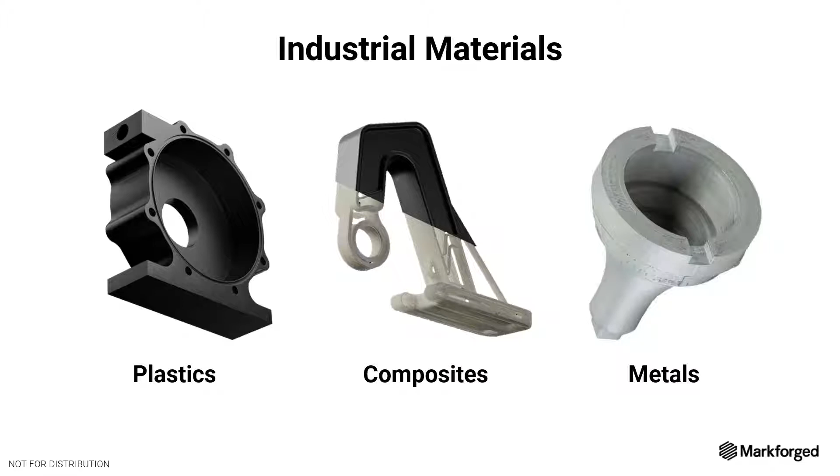So materials - we're talking about industrial materials. Really, the mantra, the name of the game for Markforged is strong materials. They're not after the weak ABS or PLA materials, their game is strong parts. So you see they have the plastics, which is the chopped carbon fiber, and then they have the continuous reinforced fiber in the middle there. And then, of course, to fit into the strong parts, they have metals. So that's what we're going to introduce, the Markforged Metal technology.

Now this was introduced probably 3 years ago maybe, and ever since then they've just been on a full court press developing new materials. They introduced a larger sintering furnace, and really just honing in the software to have a better user experience and better results with the parts that you get out of the system.

So basically, it did change the game. Pat and I, when we first started this division 6 years ago, we had a powder bed system in here for 4 years, and it was difficult - it was difficult to run. There was a lot going on in the laser system.

So when this came out, we had it delivered, and in one week we had everything up and going and printing parts. The safe part of it is that you don't need an explosion-proof room. All the metal powder is bound in a reel, and I'll show you the metal powder when we flip on the webcam. So it's safe. The actual 3D printer can work right in the office if you want it to.

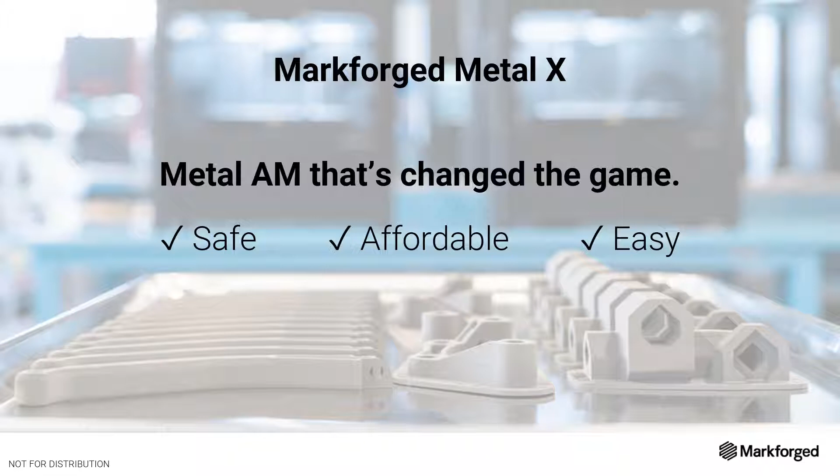Easy. Like I said before, we had the system up and going in less than a week making parts. And you'll see the software that drives it is very easy as well. Really the caveat, the easy part, running the system is easy.

And really where the skill comes in is designing your parts - designing your parts more for additive manufacturing and more for the Metal X system itself.

So the metals right now available through Markforged and through Miller 3D, we have these six materials, which I think are very exciting, available right now. They're sitting right in front of me. We have 17-4 stainless, Inconel, H13, D2, A2 tool steels, and then also pure copper - it's not a copper blend, it's pure copper.

In development is titanium and 316L, and this is not a short list. Their list is very, very long. If you flash forward five years from now, there could be 100 metals.

But there's one thing that's clear - Markforged, before they release anything to market, whether it be material, a new 3D printer, whatever, goes through a lot of testing, a lot of third-party testing before they release it to market. So it takes some time, but when they release it to the market and to the users, they know it works. And in my mind, I'd rather that - I'd rather not be the guinea pig.

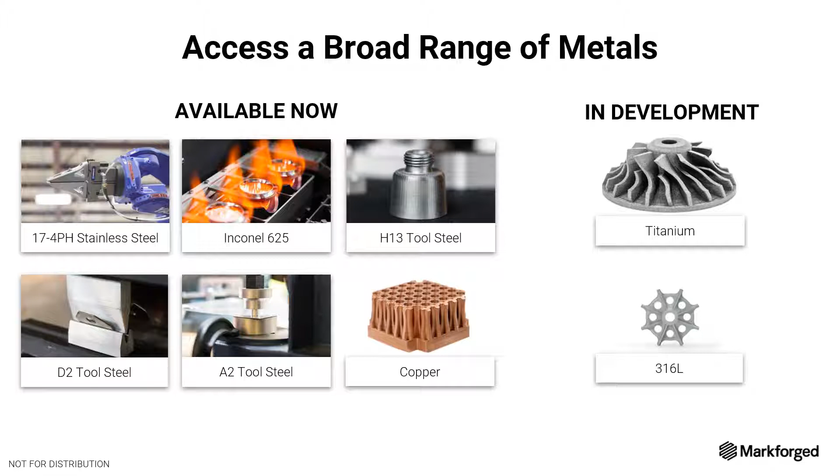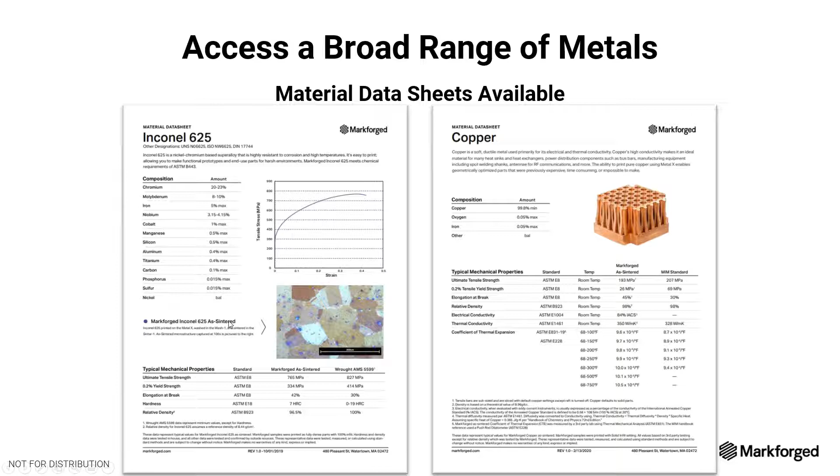With the third-party testing, each material released to the market also comes with a third-party verified data sheet. It goes through all the composition, it goes through the mechanical properties. In the case of copper, you also have electrical and thermal conductivity that's important in that material. So all these are available, and if you'd like to see them, it also has a little grain structure that you can see here that they get as well.

So how does this work? At a high level, you print it, you wash it or debind it, and then you sinter it, and then you have your part. So it's a three-step process: you print it, you wash it, and then you sinter it, as far as the physical part goes. Then there's the software, which obviously comes before, and we'll take a look at that with Pat.

So these are just some videos of the 3D printing process - obviously not this fast yet. It's important to know what's going on here though. If you're familiar with FDM printing, which is the most common, it works very similar. It's a metal reel, a lot like the plastic reel - heat it up and it's fed right through the nozzle, and you 3D print just as you would with plastic material.

Also, the print head has a second nozzle, and that lays down this white material here. Now, the white material - what that is, is a ceramic. The ceramic is the interface between the actual part and the support structures. So this whole part will ride along into the debind or wash, and then it goes through the sinter. And out of the sinter, this white ceramic material will turn to dust or powder, and then your part just pops right off.

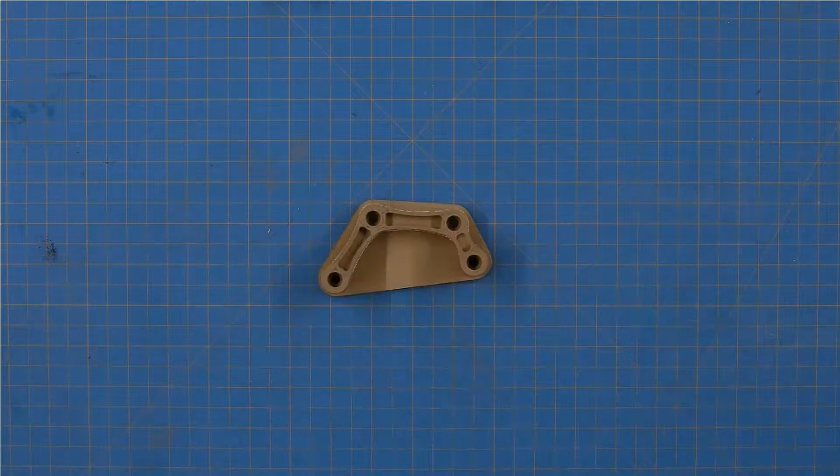So after you're done with the 3D printing, you open up the doors. It is a heated environment. You see the build sheet that it prints the part on, and then you just peel away the part off the build sheet, and you're able to use the build sheet again for another part. The build sheet is held down with a vacuum table inside the machine, so you don't need air to the machine—there's an onboard compressor. And there's your part.

So this is in the green state, what we call the green state. If you look down under a microscope, way, way small, you're going to see something that looks like this. These are the metal powder particles, and there's millions of them. They're all held together with a wax polymer—the wax is in orange and the polymer is in blue. So it's all holding the metal particles together.

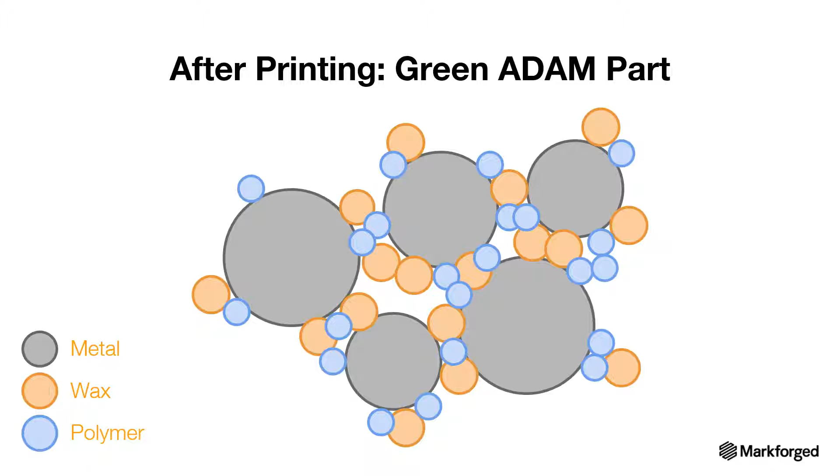So now the trick is, how do we get that all out of there? How do we get the wax and the polymer out of the green part so we're only left with metal? And this is where, remember when I said this is a three-step process, this is where the other two processes come in.

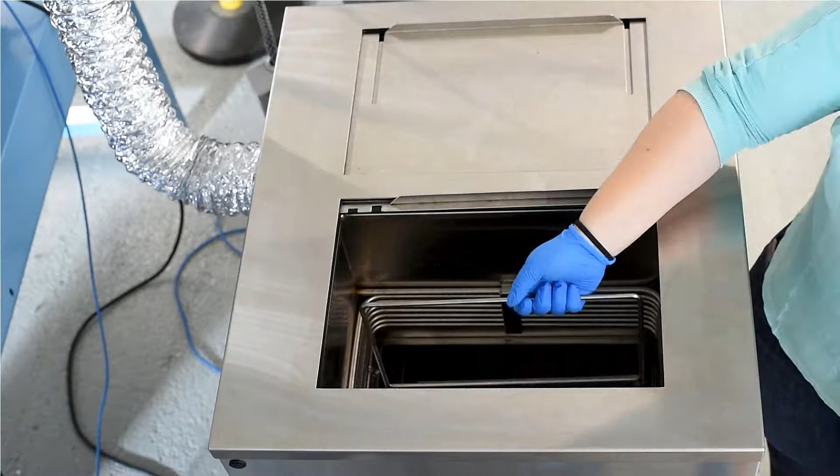So the next is a wash tank, or debind. This is a way to get rid of the wax. There's a chemical in there—it's almost like an industrial degreaser, and the solution basically permeates the part and extracts all the wax out of the part.

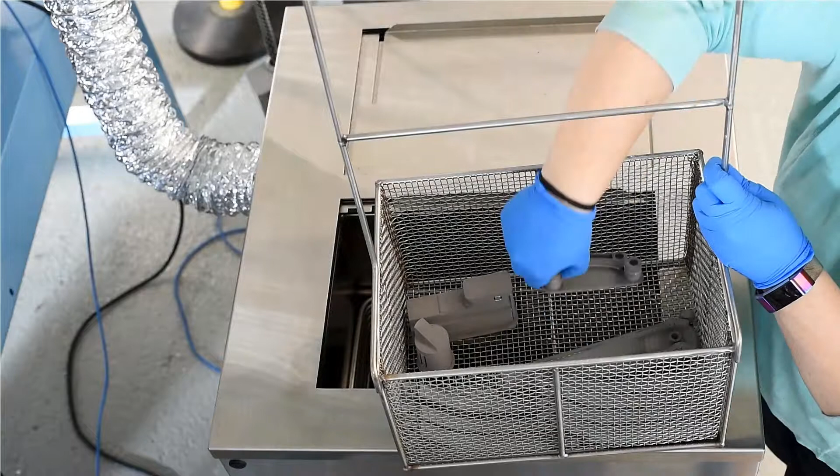So you can see you can do multiple parts at once. You can have different layers if you want, and you can't overwash a part, so you can leave them in over the weekend. Once a part is ready, you take it out of the basket and put it over into the drying area. This is just drying, making sure the part is at a certain weight—there's a weight reduction we're looking for from the printer out of the debind tank. That weight is the wax. Once we're good on the weight, then we can move on.

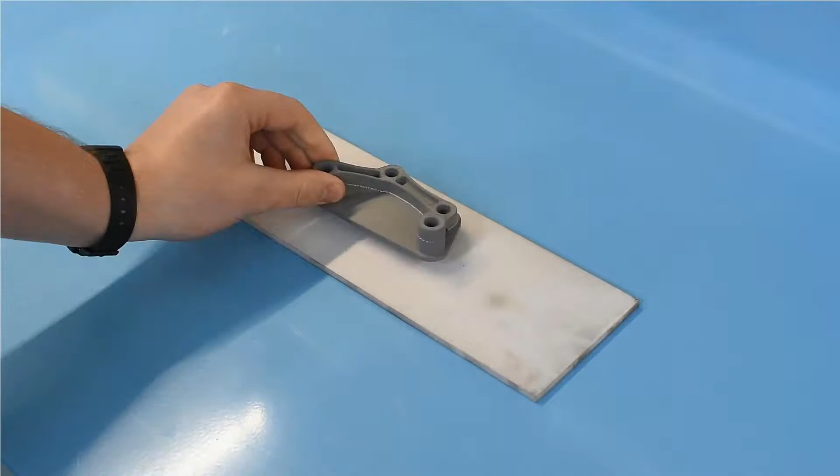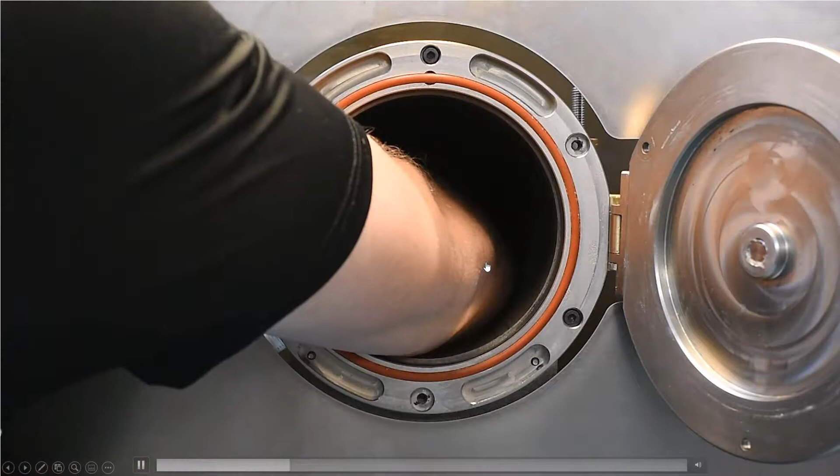Over to the sintering—the sintering furnace has a ceramic plate that you place the brown part on. Now we're calling it the brown part after the wash. This is the sintering furnace here, it's a tubular furnace, and you place your ceramic plate all the way in. There's a stop, and then you tighten it up, and then you sinter it.

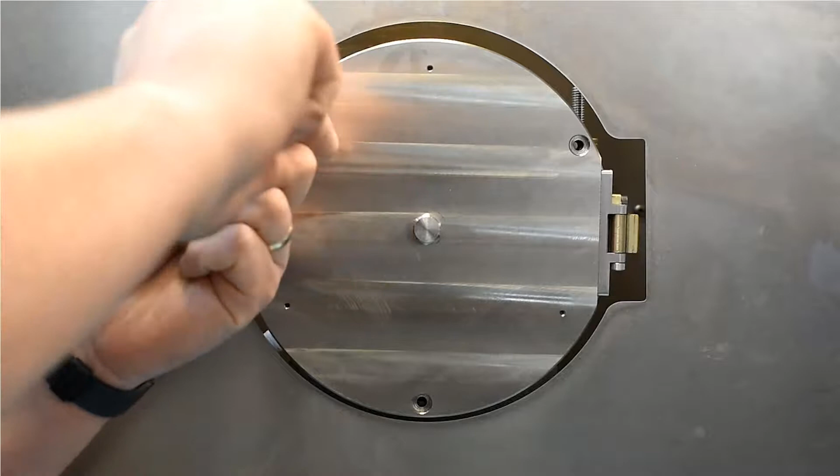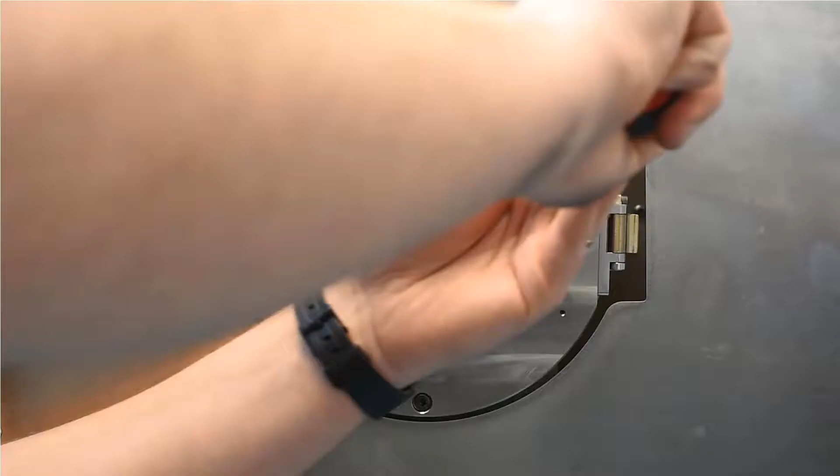Each of the materials has a preset sintering curve, where it heats up at a certain temperature, then heats up to around 80% of the melting temperature, and then ramps down. All the materials are already set for you, which is nice—you don't have to play around with any of the heat curves. You can sinter as many parts inside the furnace as you can fit on the ceramic plate, whether small, larger, or a lot of small parts. It doesn't matter—it's a fixed cycle, and each material has its own cycle.

So when you're done, you pop open the door, and right out of the furnace it's completely safe. The sintering furnace is tricked out with all these different sensors and everything, so when you open up the door, you're assured that it's completely safe.

And now this part is 100% metal. There's no binder in there, no wax or polymer inside that part—it's 100% metal. Now, you might have seen how easy it was to take the part off of that.

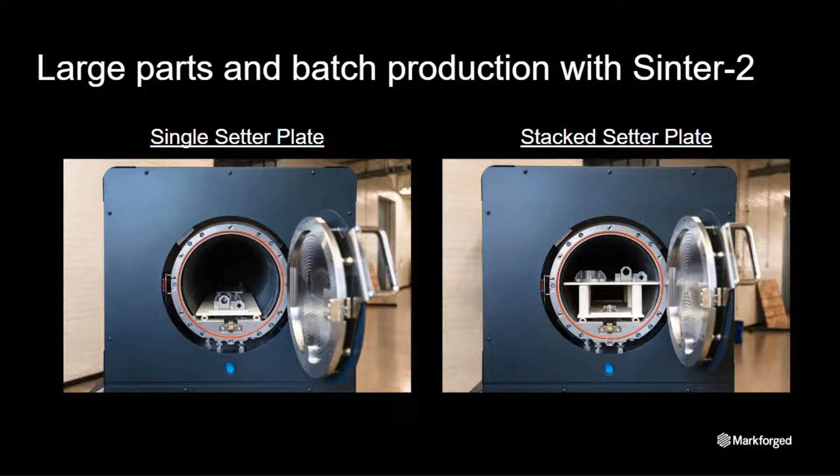So I just wanted to talk about one of our customers before we go over to Pat. The name of the company is Caldwell, and what they make is high-end window closures, door closures for all different companies, large houses, things like that.

They started off on this journey with just a plastic printer in mind, and what they ended up getting was a carbon fiber printer as well as the metal system. What I find interesting is that they really adopted it. You can see right from the president, it's part of their culture now, and they really can't live without it.

So much so that they've ordered many more of the carbon fiber 3D printers, and they put these printers at different divisions around the country. It really allows the tool makers and the design engineers to get creative, have design iterations, print actual functional tooling for production, and it's really across the board.

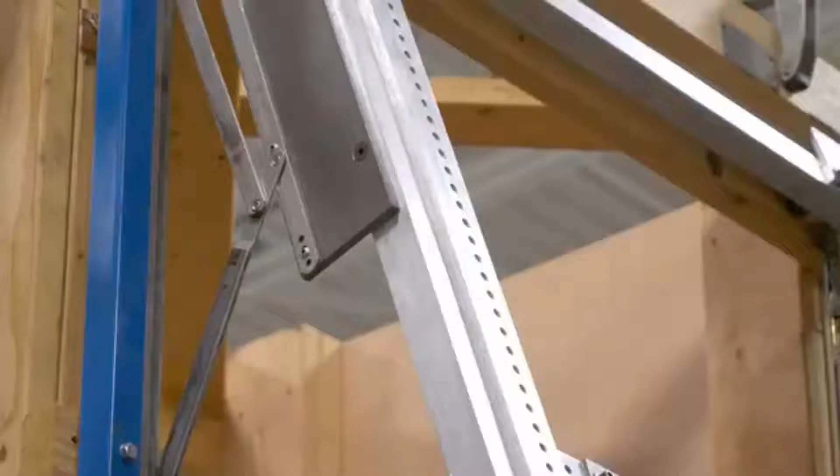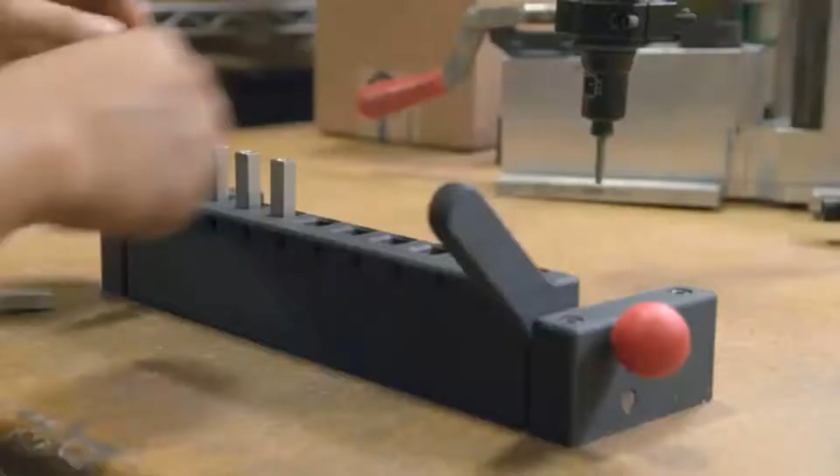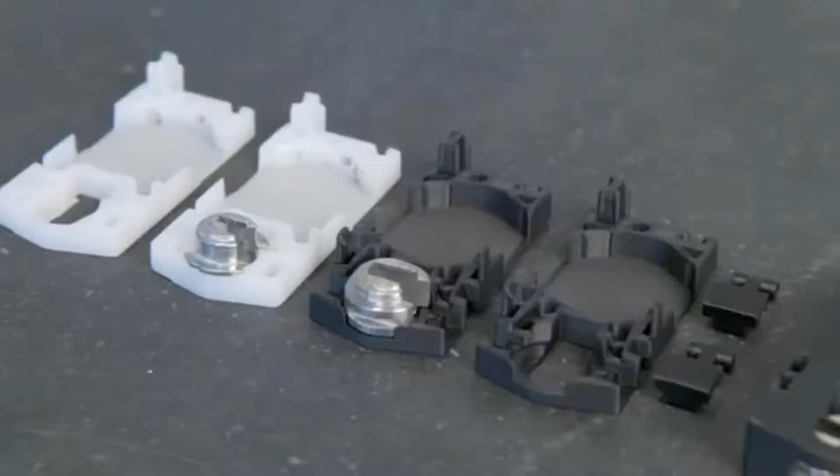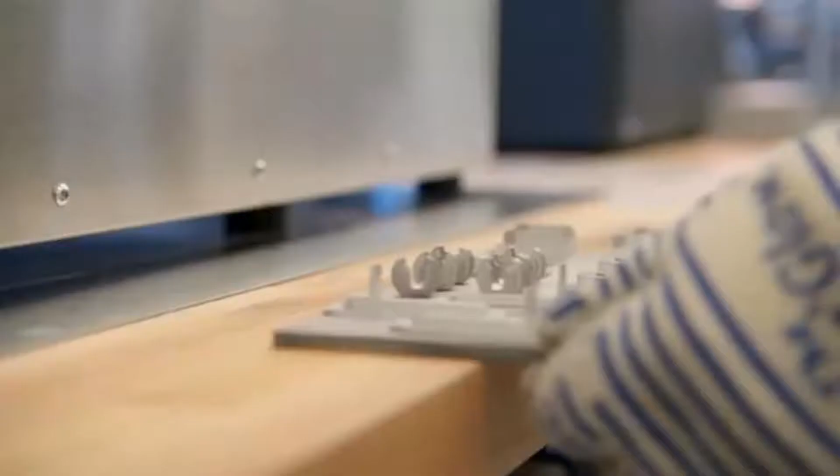To make everything from prototype all the way through low volume production. That's 2 days.

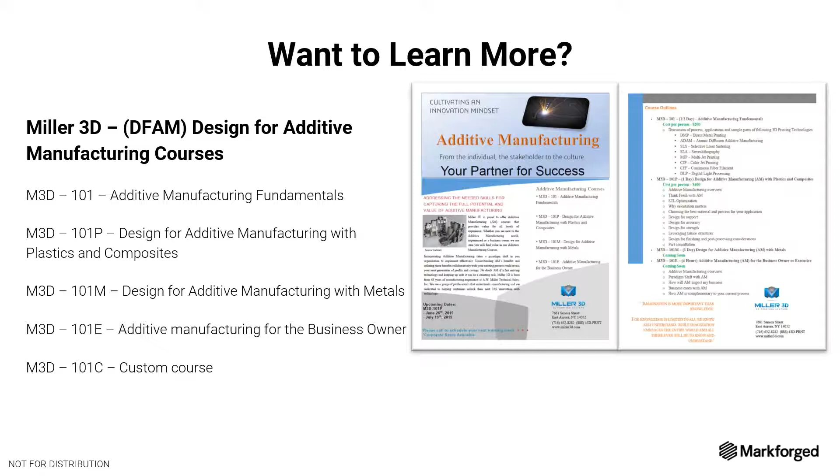Also, Markforged has it covered on the back end. Once you actually have the equipment in house, you can either go to Markforged or they can come to you, and they can teach you all about additive design for the Markforged equipment specifically.

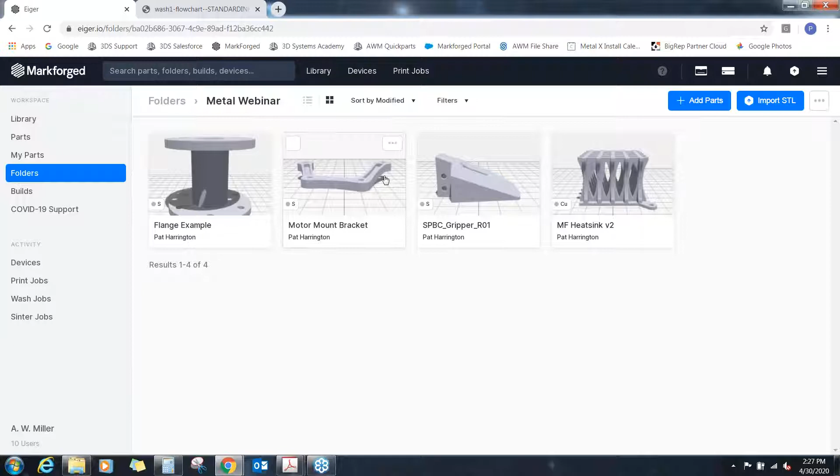What we'll do is start off with a file that you saw in some of those videos. This is a mini motor mount bracket that's printed in 17-4 stainless steel. So we have here our grid pattern — this is the size of a part that we're able to print on our Metal X system.

And then we have a few options that we can play with. So material, we can choose from 17-4 stainless, 3 different tool steels, an Inconel, and a copper. And then you'll see below here that we're also able to choose which type of sintering furnace that we're going to use to accommodate these parts.

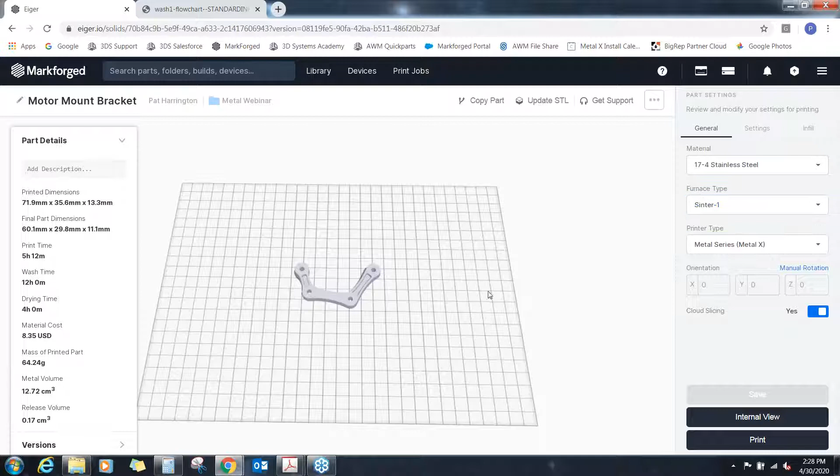What this really does is it dictates the size of the part that you can send through the whole process. So if you have a Sinter 1, you're constrained to smaller size parts, and if you have a Sinter 2, you're able to do, for the most part, up to the full build envelope of the printer, which you're seeing here. So I have a graphic pulled up here that kind of shows what size parts each of the configurations can accommodate.

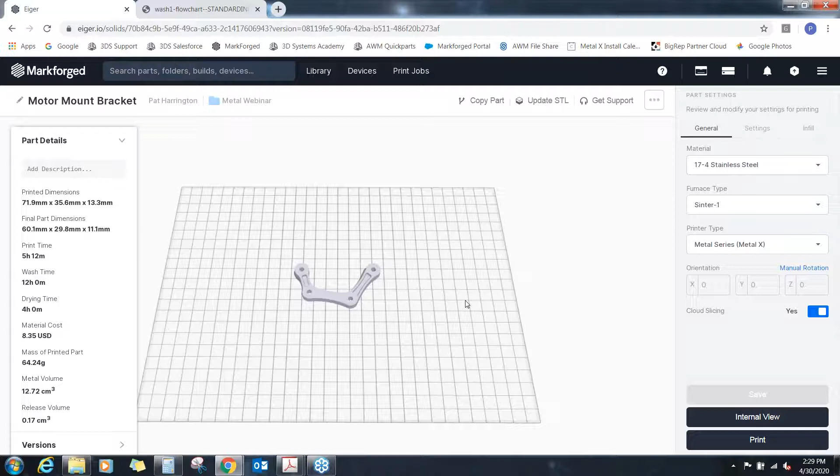In terms of setting up your print, as Matt said, it's very easy to just choose some simple options and set this going, where compared to the powder bed system that we had in the past, with that system we were really tuning and tweaking laser speeds and laser power and scanning speeds and all these things. This machine's really just tell it how you want it to print and it will take care of the rest.

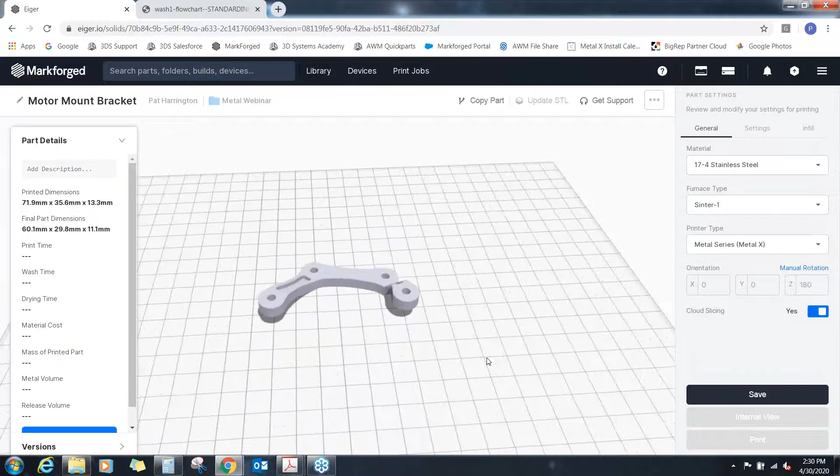So part orientation is very simple. In a case where this part maybe came in, maybe you designed it on a different plane system, came in like that, you're just going to go ahead and click on the surface that you'd like to be down facing, and it will automatically snap to that. So I'm going to spin that around here. And we can go into the settings tab.

So we have some opportunities here to choose different layer heights. This is post-sintered layer height. The reason why it's saying post-sintered layer height is because these parts are actually going to be printed at a factor of around 20% larger than you design them in your CAD. And there's nothing you need to do in terms of compensating your parts. The software is intelligent enough to handle that on its own.

So I'll kind of show you the difference here. If I switch over to our composite machine, this is the true size of the part that will be your finished product after it's sent through the whole process. And then this scaled up version is the scale at which it will print to accommodate for that shrink factor. So 5 thou is the equivalent of 0.125 millimeters, and that will be your post-sintered layer height.

Now we also have an option in some of the materials to experiment with an alpha print setting. Alpha is just another way of saying it's an experimental print setting, something that they like to release to customers to give them an option to play with before they release it as a full finished print setting. But we've had some nice success with it. 50 micron layer height, that's the equivalent of 2 thou. We've had good success with printing some parts with threads that come out quite nice. That's just another option that you have to choose to play with.

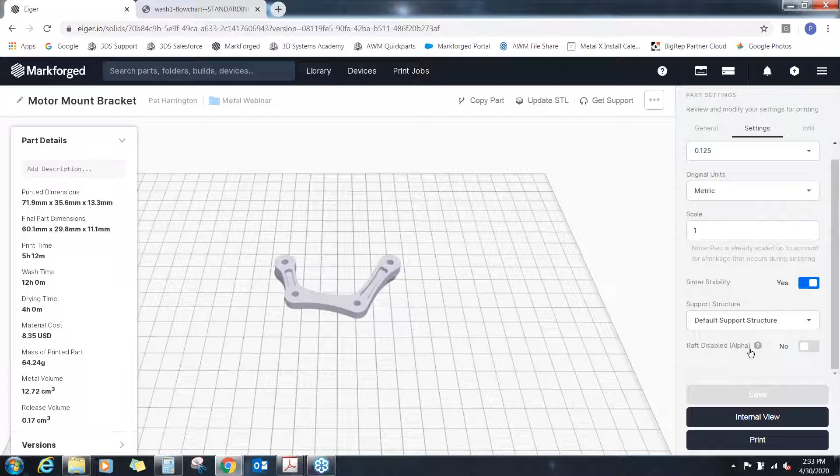Lastly, an option here is disabling the raft. As you saw in the video, this part is printed on a raft. There's an option to disable rafts for smaller or more flat parts. But what we've found is the raft does quite a bit for making sure the part shrinks uniformly in the sintering process. These parts shrink around their geometrical centroid, so the raft ensures that, in a part like this, you won't get uneven shrinkage in the smaller leg versus the longer leg. The raft keeps the whole part together so it'll shrink more uniformly. But in certain parts and geometries, you can turn off that raft and save material and print time.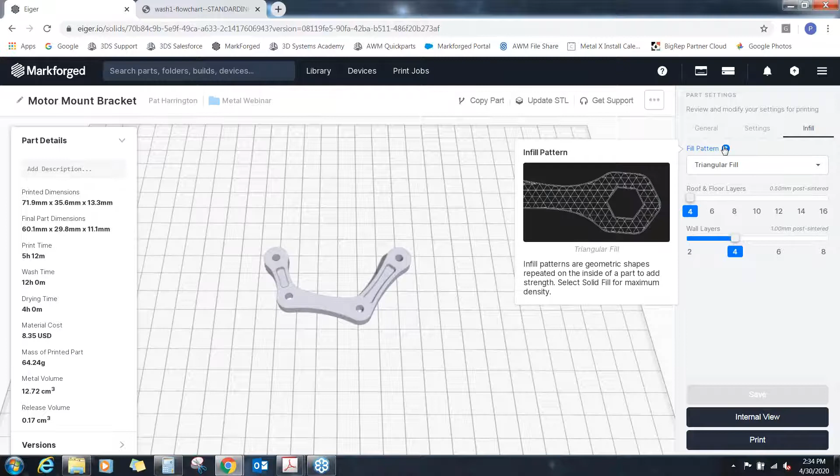Lastly, we have the option to play with our fill pattern. On these metal parts, by default, you're going to be printing with a triangular fill pattern. That saves you print time, quite a bit, and it saves you material, so cost. It also saves you quite a bit of time in washing, which Matt touched on. The time it takes to wash a part is really a function of how long it takes that solvent chemical to penetrate through the entire cross-section of the part. So with your part being infilled, that will take roughly 12 hours for most parts, as you can see highlighted here. But as we go towards solid, it's going to increase the amount of time that wash cycle will take.

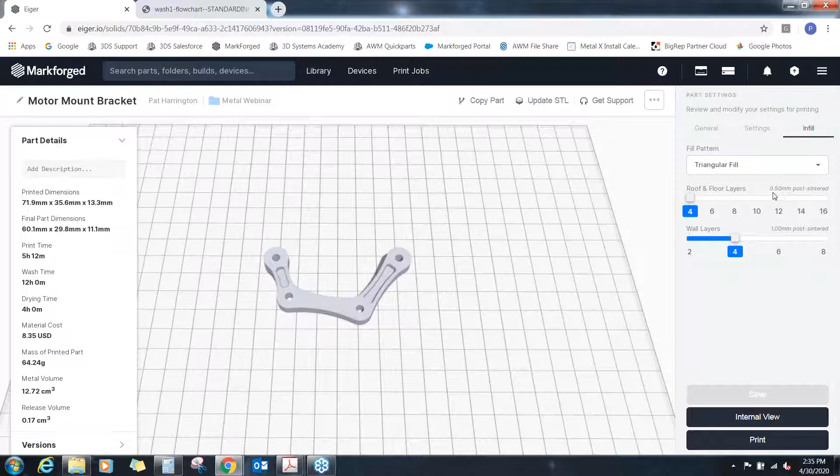Another set of options we have to play with are roof and floor layers, as well as wall layers. What you're seeing here on the side tells us what that thickness is on the outside shell of our part before the infill starts. This is particularly relevant for folks who want to print a hole that's a critical dimension and want to ream it out to get it perfectly to size. This will give them a little extra stock on the inside of the part that they can remove to get the hole true to size. You can control, based on what we select here, how much post-sinter stock is on the part before the infill starts.

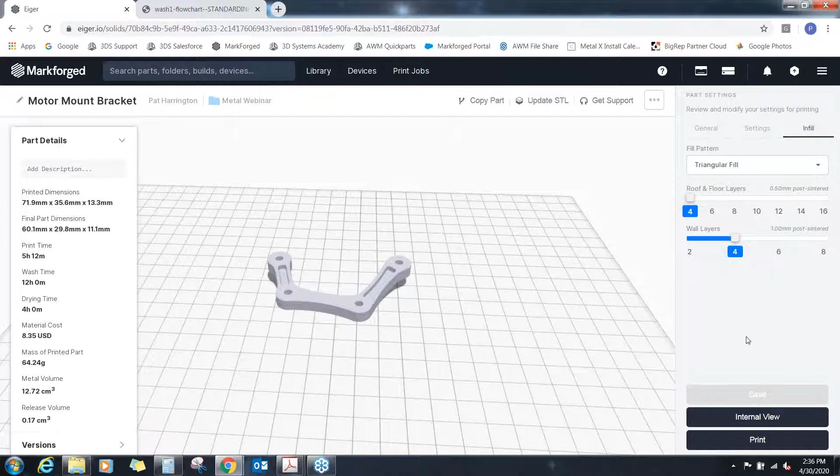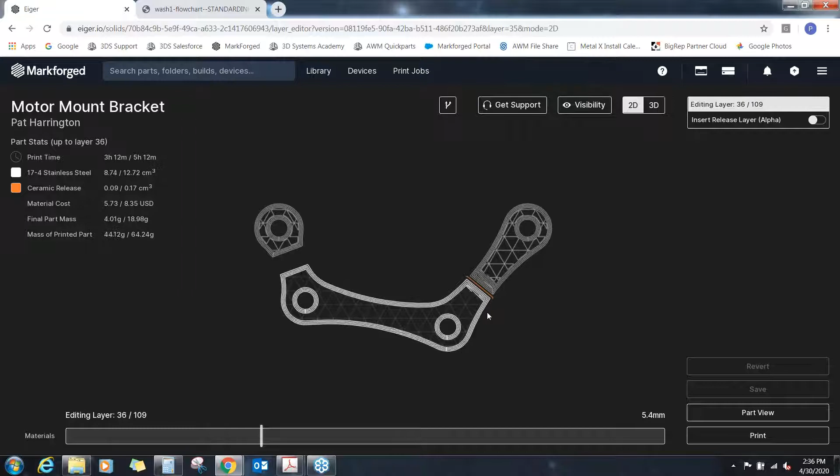So those are some of the options here. If we go to our internal view, you can get a better look at the raft we mentioned. And if I go to my 2D view, as I scrub through the individual layers, you'll be able to see this orange, which is the ceramic release material. As I move through the part, you'll see the ceramic release material is added as this part grows on top of the support structure. At the end of the sintering process, as Matt mentioned, we like to clamp the raft part in the table vise, tap the back of it with a hammer, and the part will pop right off of the raft. So pretty simple in terms of options you need to designate for your parts.

Let me show you another part here, just to give you an example of the options they're continuously adding to this cloud-based software. And because it's cloud-based, you don't have to worry about downloading them. You just log on one day and see that you have new options to experiment with.

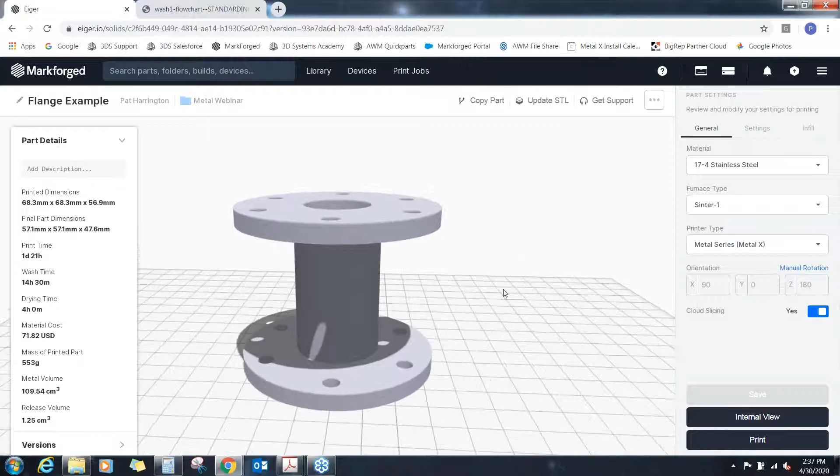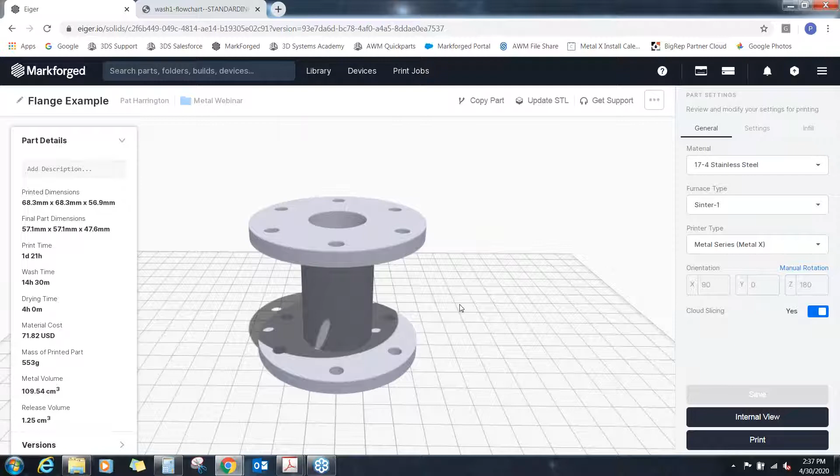When we first got this machine, a geometry like this was very challenging, and basically we couldn't do it without getting creative, mechanically removing supports with maybe a Dremel or something. The reason for that is the support material is required underneath this upper flange, and it connects the upper and lower flange. It's basically going to be a complete donut shape of supports around this inside neck, and there's no way to remove that donut shape. That's why Markforged came up with an experimental print setting we've had a lot of great success with in parts of similar geometry, which is Radial Separations.

This allows you to designate how many radial cuts you'd like to implement into the part. And if I go into the internal view here and I take a cross section,

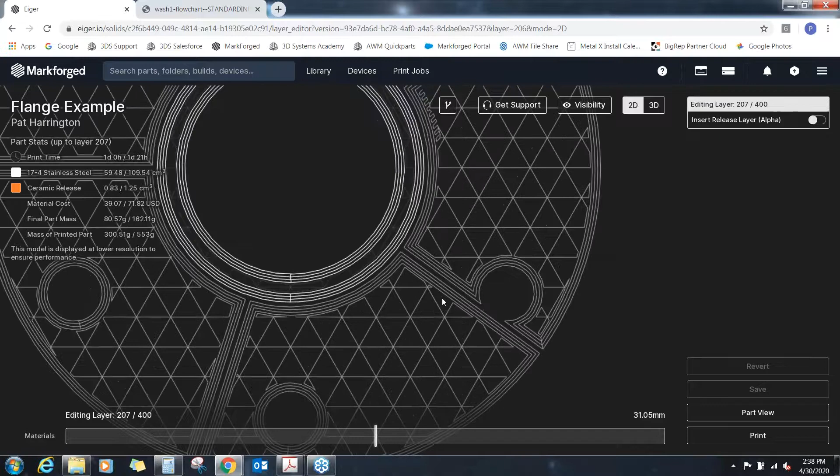You can actually see here's my inside neck of the part. This is about halfway up the part. And here are the supports. You can see these nice radial cuts in here. So this is going to allow this previously donut-shaped support structure to be removed in 5 sections.

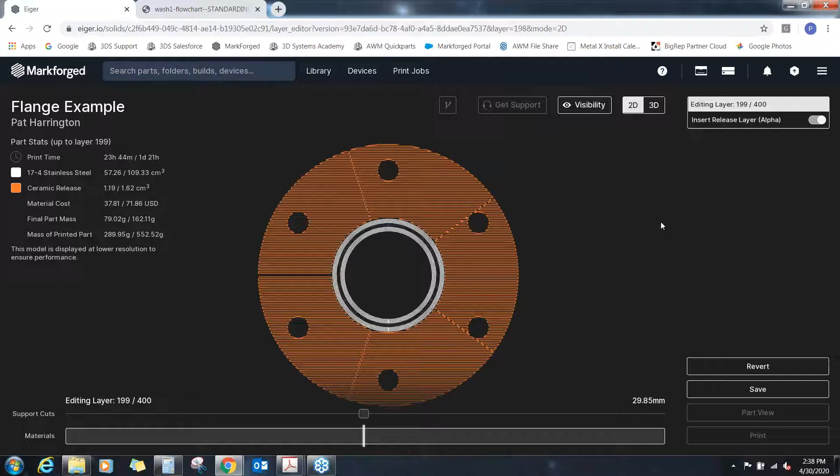We can also get creative with adding separations vertically in addition to horizontally. So by doing that, we'll go back to a layer, and we'll just say on this layer, insert a layer of ceramic release material. So you can designate where you'd like the printer to print this ceramic release material.

After the sintering process, on this layer, that ceramic release material will turn to a powder, and you'll be able to remove this support structure as 10 individual pieces rather than 5, because these 5 sections will break up into top and bottom sections. So it'll just make removal even easier. This is a great tool for parts that have more complex support strategies.

Let's take a look at our metal printer in Eiger. So Matt's going to show you some of the parts that are going on it right now, but we also have the ability to tap into a camera, and we can kind of see what's going on there.

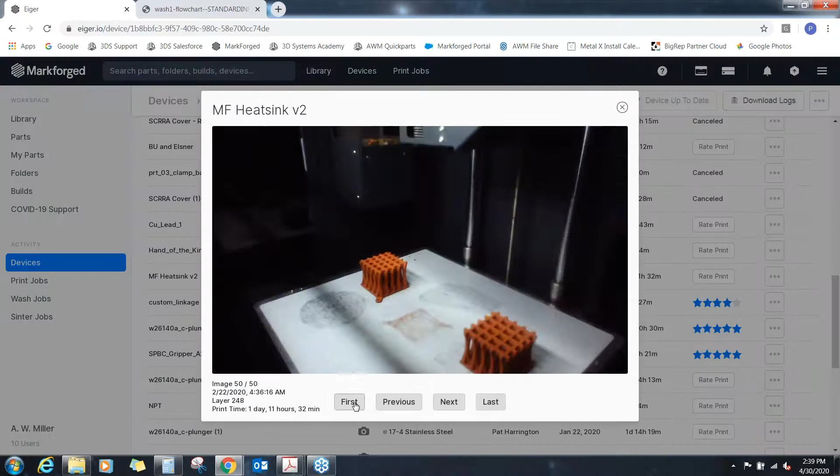Let's see if I can find some heat sinks. So here's some copper parts, and every 5 layers, it's going to take an image as it's growing our metal parts. Sometimes we like to check in on our phone, make sure the parts are looking good. And you can do that right in the Eiger software.

Another part of the metal process, which is captured in the Eiger software, is this wash tab. So as Matt mentioned, we like to wash our parts prior to sintering. It takes it from a green part to a brown part.

What we're really looking for to tell ourselves okay, this part is okay to sinter, is the mass reduction. So Eiger makes that fairly easy. Let's take this same sample part, the motor mount bracket, and we'll click that we're going to wash this part.

So it's going to ask us, okay, before you wash it, please record the mass of that part. So we'll say it's at 57.56 grams. And then it's going to start a 12-hour timer.

As Matt mentioned, you can't overwash your part, so feel free to leave it in there for extra time. And then you will get an email from Eiger when your part has been in the wash for 12 hours. You'll go ahead and select, we're going to dry that part.

And it will start another timer of 4 hours. We found that 4 hours is pretty conservative. It's more for larger parts. A smaller part like this, you can typically have your part dry within an hour or so.

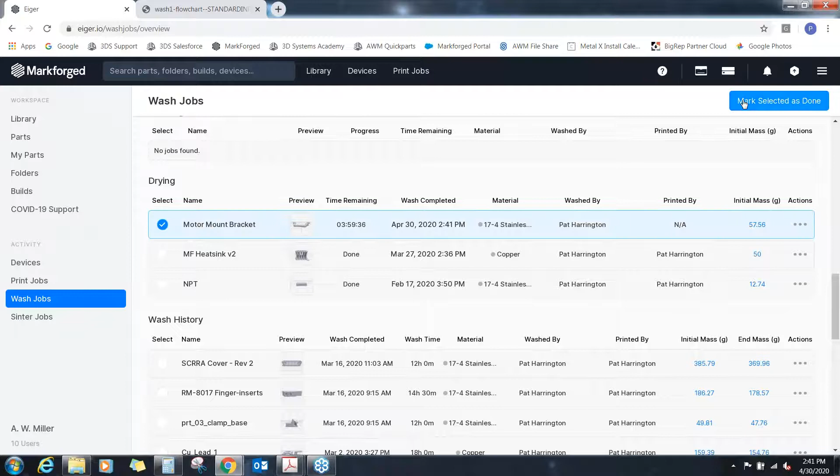You just want to make sure all that solvent's evaporated so that when you take the next mass measurement, you're not measuring the solvent. So we'll say okay, that part's dry. And then you'll enter in the final mass after you weigh the part, and the software will either not say anything, which means it's safe to sinter, or it will say, hey, your part has not reached the desired mass loss yet. Please rewash your part until we've hit the 4.1%, which is specific to a few materials.

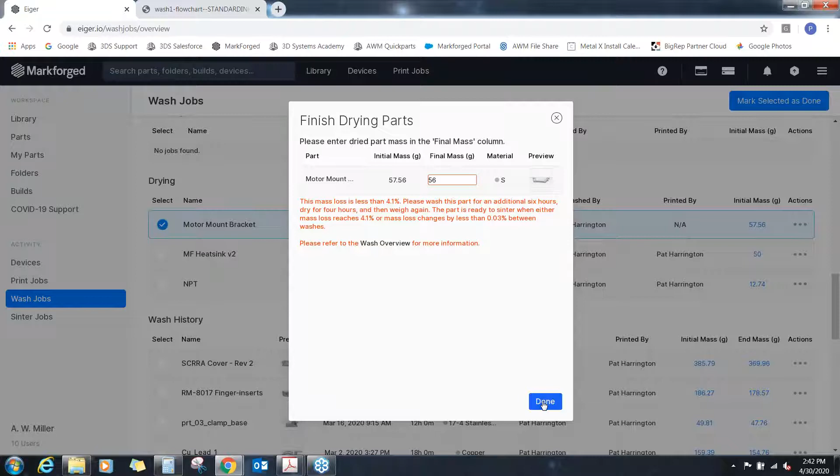In this case, 17-4 stainless. So let me pull up a flow chart that we have. Here are the mass reduction percents that we're shooting for in different materials. So for 17-4, H13, and A2, we're all at 4.1. Inconel is 3.8, D2 is at 4, and then copper is only 2.7. There's not quite as much wax in the copper material.

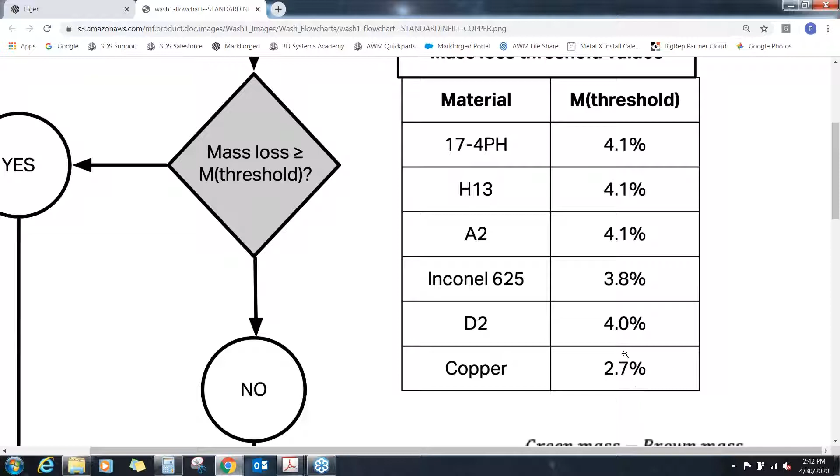As long as you get the okay from Eiger, you can put your parts into the furnace. The sintering process is controlled on the unit itself, but it can be monitored from Eiger. The run duration is really just a function of the material that you're running. It's not governed by how many parts you have in the furnace.

It's just a function of what material you're running, so it's always better to load up the furnace with as many parts as you can to keep your per-part cost down. And then those runs can be monitored from Eiger software. So if we look at this part here, this is a 17-4 run we did. It's going to estimate how much gas usage, inert gas we used, as well as our forming gas that are used in this process.

All right, so that's what I had for you on the software side, a quick overview of the whole workflow there. Anything you wanted me to add, Matt?

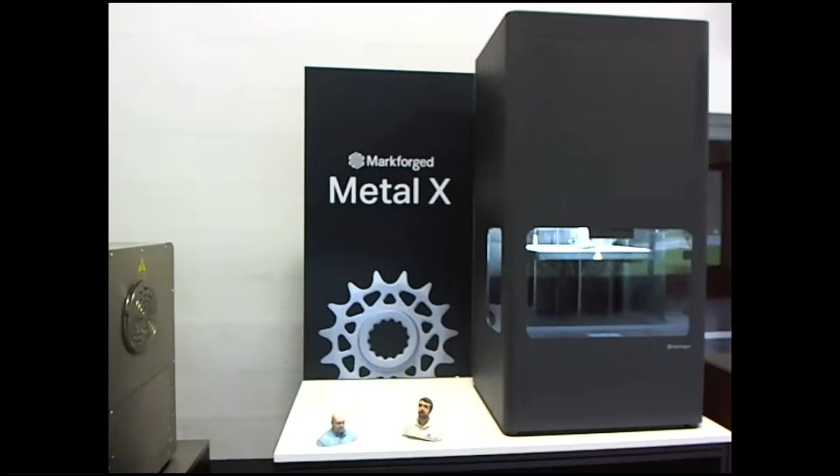No, I don't think so. We'll go on to the... thanks, Matt. Yeah, it was good. Now I flipped on the webcam. This is a live webcam, you can see my hand there. Just let me know if you can't see it. So basically, this is our Metal X, okay, and then we'll go down the line here.

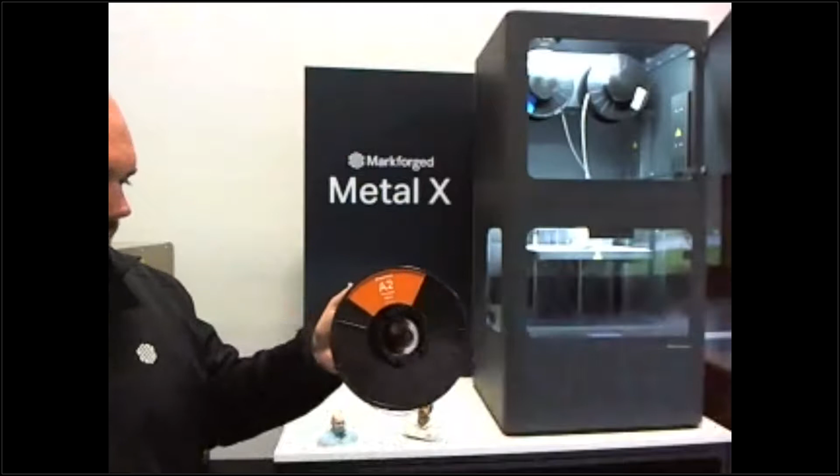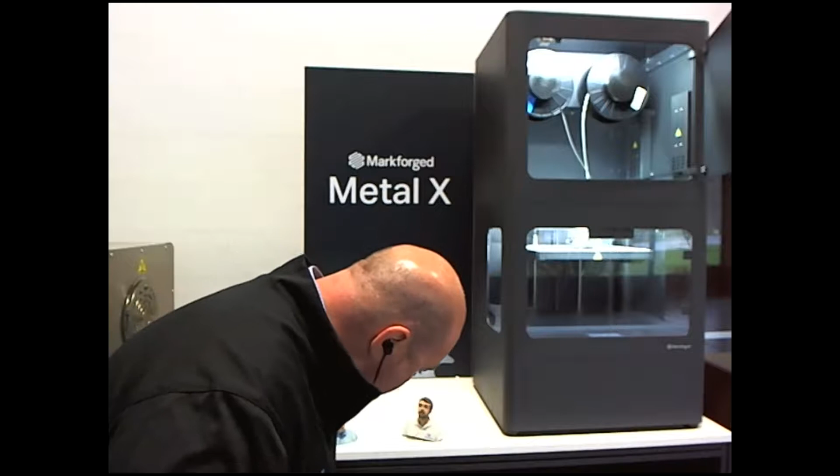So this is our Metal X printer, and I'll show you where the materials are. They're up in here, and you can see we have one reel of the 17-4 on the left, and then the ceramic on the right. What's really cool is that I could go from 17-4 over to A2 in about 10 minutes. This is the material, it comes in reel form. So going from copper to D2, A2, Inconel, whatever, I could do that relatively quickly.

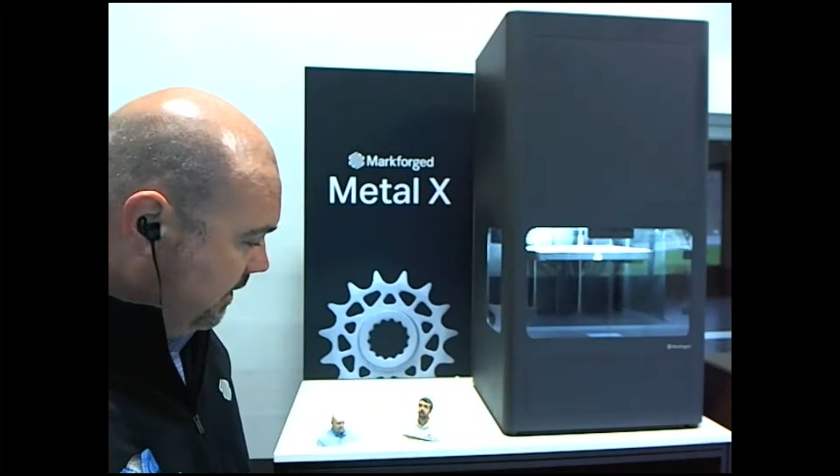And by the way, A2 and D2 can't be laser sintered as well. Those are true tool steels like H13. And if I loosen this up, you can see the materials down here.

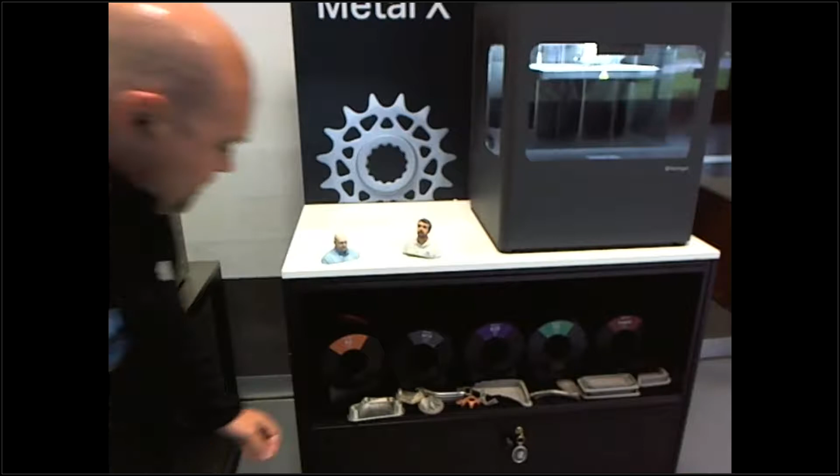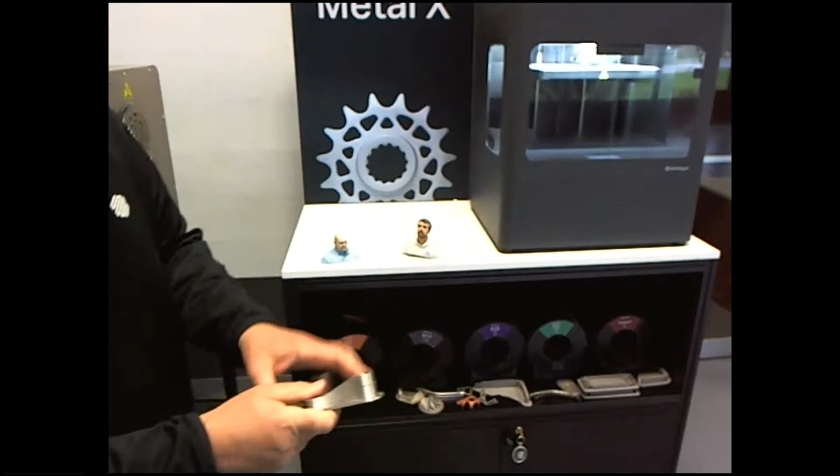These are actually some parts here, like this is the motor mount that Pat was looking at on the rack. So what we would do is just put it in a vise, give it a little tap, and it'll pop up. This is an Inconel turbine blade right here, and if you zoom in really close, you can see the 625 marker on the part itself.

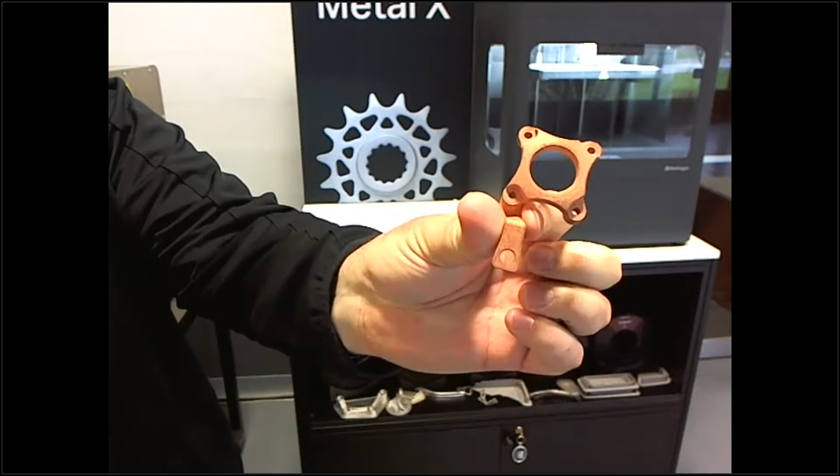Then as Pat mentioned, we also do copper. These are some copper parts that we did here. And then this is the honeycomb on the inside of the part, a little triangular view here. So that's the printer.

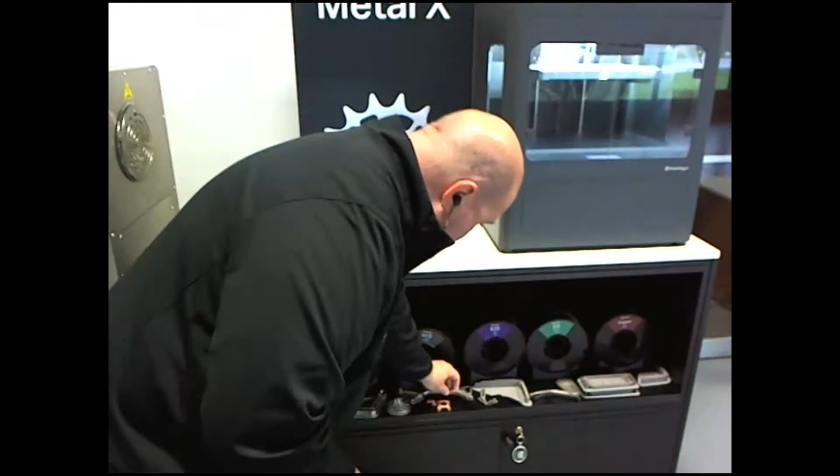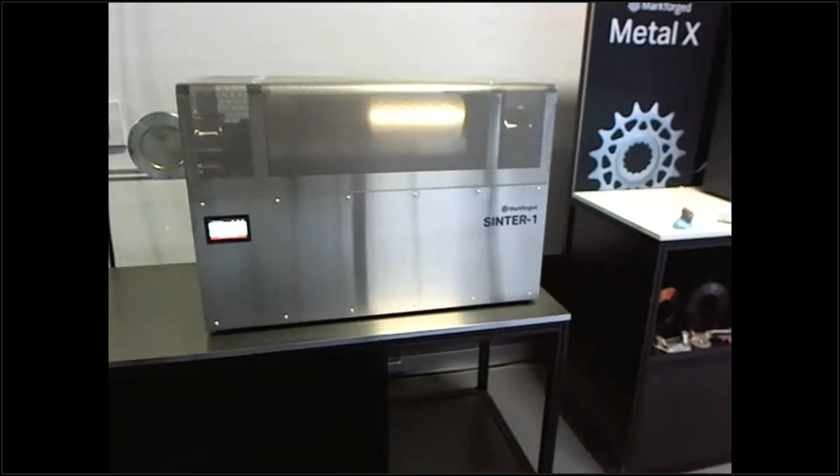We kind of march down the line here in my little cart. We have the sintering furnace, and it's the same idea as what you saw in the video. Here's the readout. This is the radiation shield, basically like a heat blocker there. And then inside is the ceramic plate that all the green parts would go on.

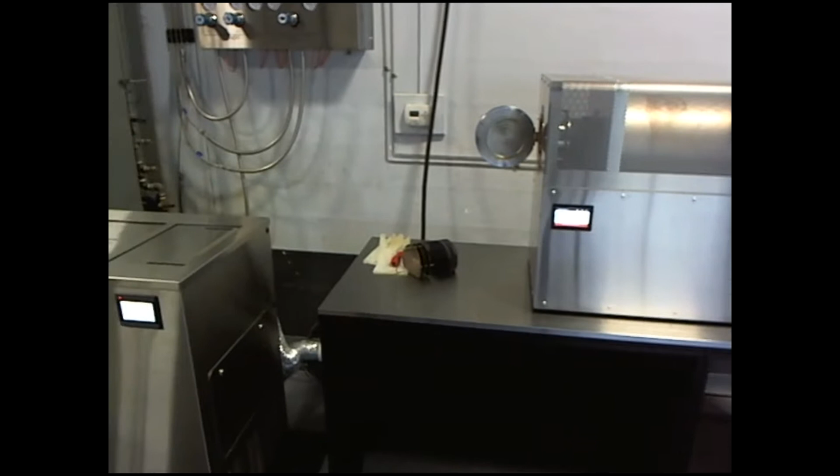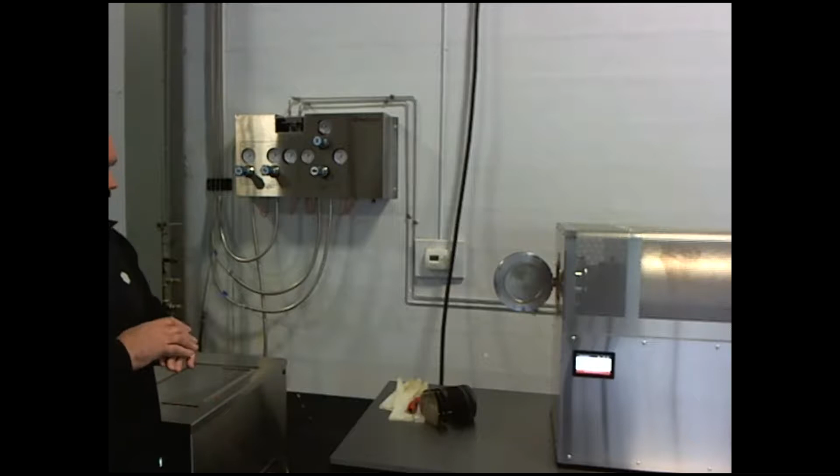Okay, so this furnace is hooked up to this gas panel, and the gas panel controls the inert gas as well as the mixing gas. There's two types of gases used with the system. One is the inert gas, all high purity argon, and that's to purge the inside of the sintering furnace. The mixed gas is mostly argon with a small percentage of hydrogen, and that's just to make sure there's absolutely no moisture inside the sintering furnace, because we don't want any corrosion or anything like that.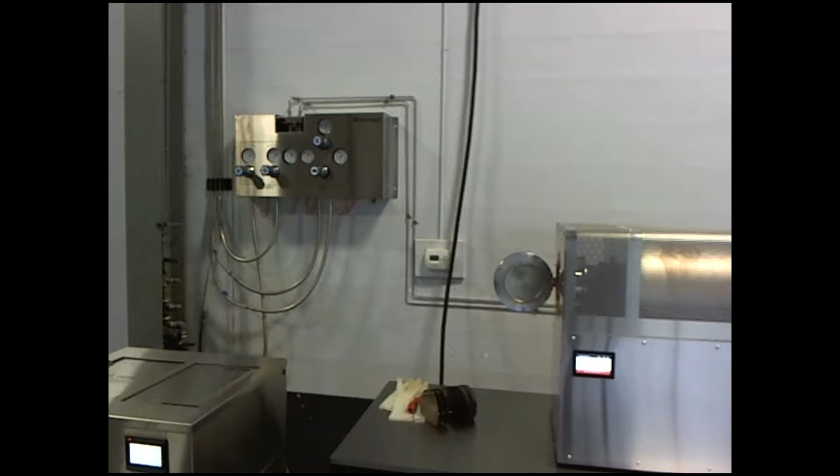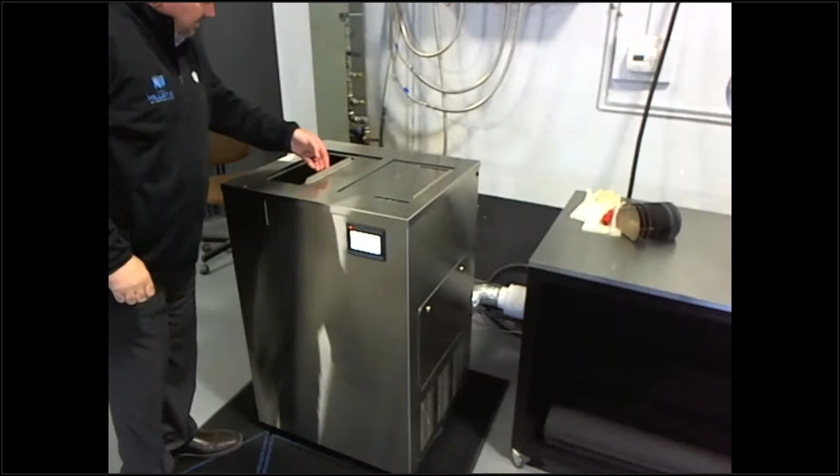Okay, and then lastly but not least, here's our wash tank, or debind tank. Again, this is the basket here, so you put as many parts as you can fit in the basket, and just let it run. This is really designed to be hands-off. The entire system is designed to be hands-off.

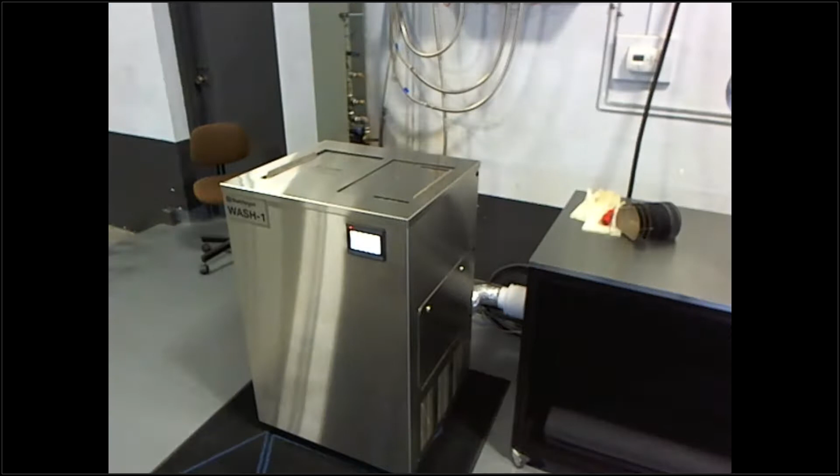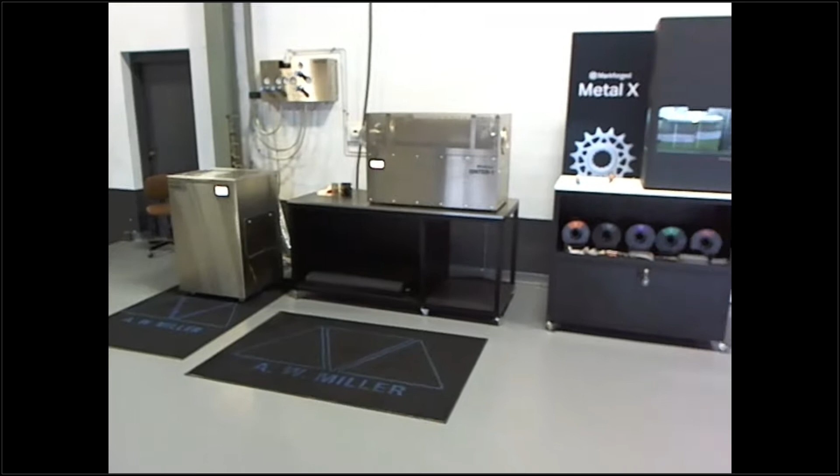And I can wheel it back here to give you kind of an overview of the entire system. So that's what you'd be looking at as far as the floor space goes for the system. Now, as far as the gas tanks, you can see our argon gas tanks over here. We chose the actual gas cylinders, so I think 4 of those are mixed gas and the rest are the inert. You could also choose liquid argon as well, it's a little bit cheaper. It'll be like a dewar of argon next to the machine.

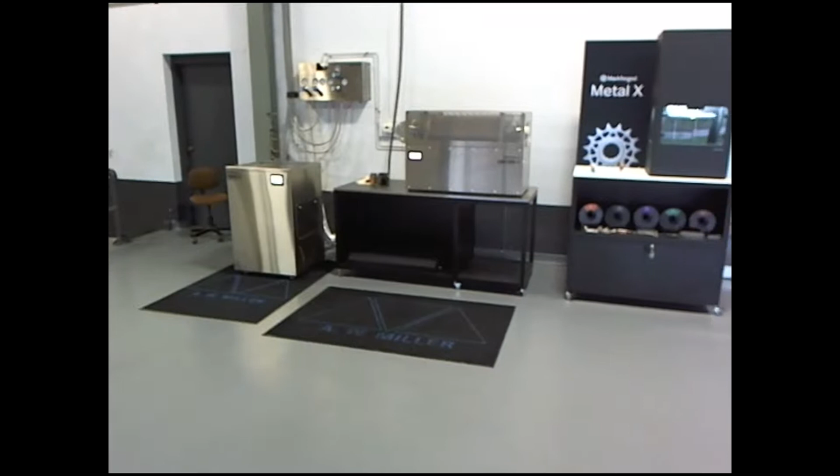The only thing we didn't like about the liquid argon is that it off-gases if you're not continuously using it for the furnace. And since we're printing off and on, it makes more sense to save the off-gassing and go with the regular gas. So that, in a nutshell, is the system. Is there any questions on anything that you heard today?

So again, we've got the printing, washing, and sintering.

Okay, going once, going twice. Oh, we have one question, Matt.

The question is, do all parts wash for 12 hours? It's really a function of the size of the part as well as the cross-sectional area. So the answer is no, not all parts wash within 12 hours. A large majority of them do, of the parts that we've done. But anytime you're getting into larger parts, maybe that would bode for the sinter 2, or if they're solid parts, they will likely take maybe a day to 2 days to wash. Typically for those types of parts, we'll just leave them in over the weekend, and they tend to be ready first thing Monday morning.

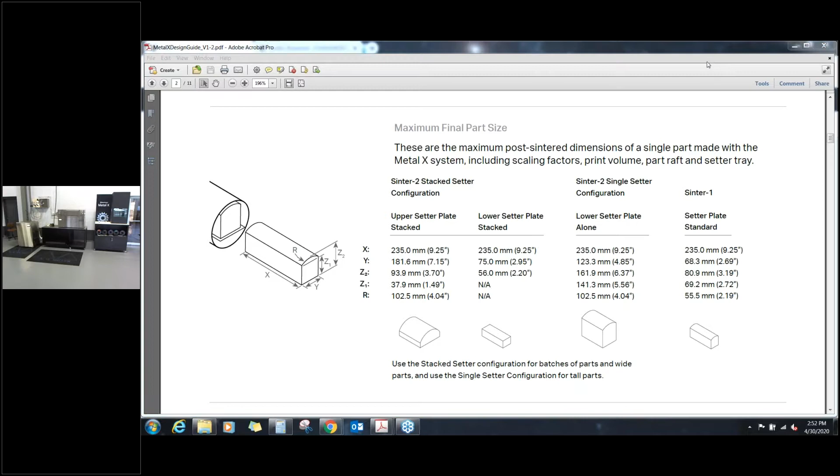Right now on the sinter 1, your part size you're looking at is 9 1/4 inches in the X direction by 2.69 in the Y. And then your height of your part is a function of whether it can fit within the radius of the tube. So if it can fit within that radius, it can go up to 3.19 inches. If it can't, it'll be 2.72 inches, and these are sinter 1 values.

These numbers account for the scaling up factor. So these are your final as-designed part dimensions. And then it will also account for that raft that's implemented to control the shrinkage. So after both of those 2 things, these are your sinter 1 part sizes.

For sinter 2, on a single setter plate, you're at 9 1/4 by 4.85. And then again, if you can fit within the radius or not, 6.37 inches or 5.56 inches. With a stacked setter plate, here's the lower - we have the 9 1/4 inches pretty consistent through all the systems in the X-axis. And then this will decide what your Y dimension and Z are. And then on the top of that stacked setter plate, you can get some wider parts - 9 1/4 by 7.15, as long as you can fit your Z within these 2 values.

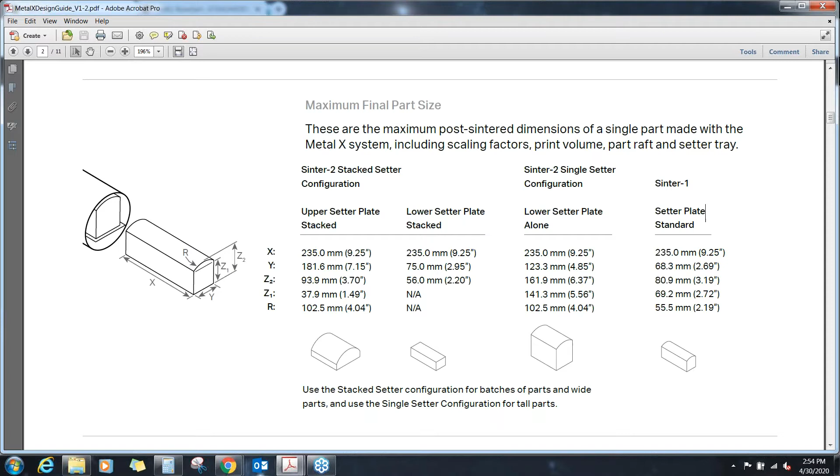Let me pull up the spec sheet for the actual printer to show you guys how big of a part that you can print. But just keep in mind that it's got to be able to fit within one of those envelopes on the sintering for it to go through the process.

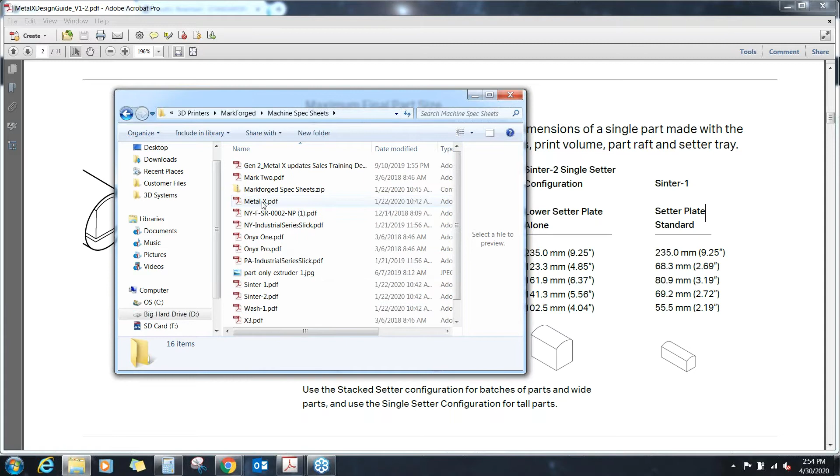Where did I put those? So right here under build volume would be the size of your envelope. But keep in mind, you have to factor in the 20% scaling factor. So really what you would want to look at is this max part size, which accounts for that.

Okay, thank you, Pat.